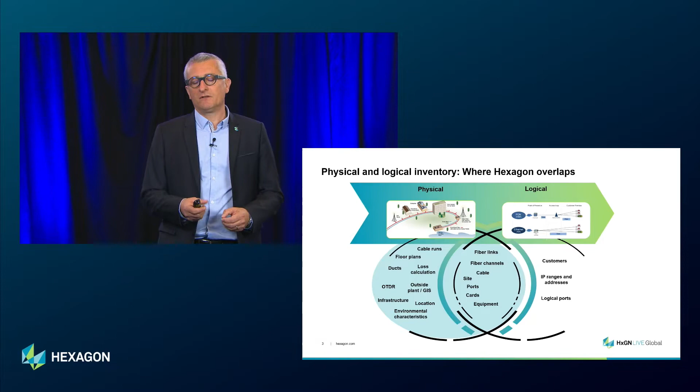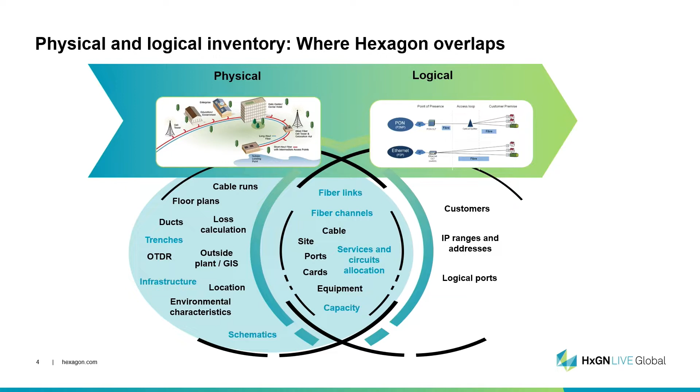This solution has been initially built for the physical inventory of telecom networks. Since a couple of years, we have increased the capabilities of the solution, mainly towards the logical inventory. You see in blue on the screen what is really new since the beginning. Fiber optic works was created in 2011, so after more than 10 years, we have increased more and more the capabilities of the solution.

If we look at the business workflows that we support with the solution, we've targeted mainly four workflows. The first one is the capability to prepare the work, meaning customers can prepare new activities in the field - new construction, changes to the network, and so on. For that, we can use a web solution.

We also have the tools to go to the field to perform surveys. It's much more than just going to the field and looking at where to dig, where to place new cables and new chambers. You can also go to the field and look at the facade, identify where to put new splitters, and even identify the number of living units in the building.

Once you have collected all the information in the field digitally, you can send this information back to the office, and thanks to the desktop application, you can go towards the detailed design. This is where you define all the capabilities, all the specific materials that you put in the ground, on the poles, or inside the building.

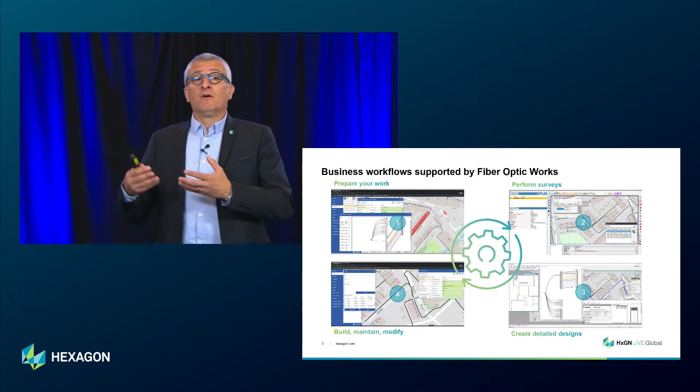Last but not least, thanks to the web solution, you can modify and plan the change for maintenance, for new construction, and follow up the construction in the field, as well as the modifications you need to do on the network.

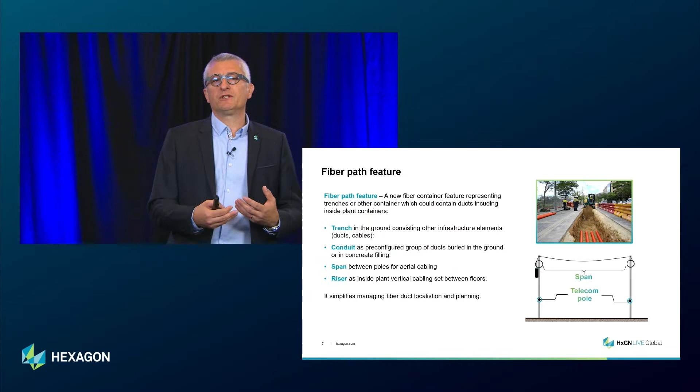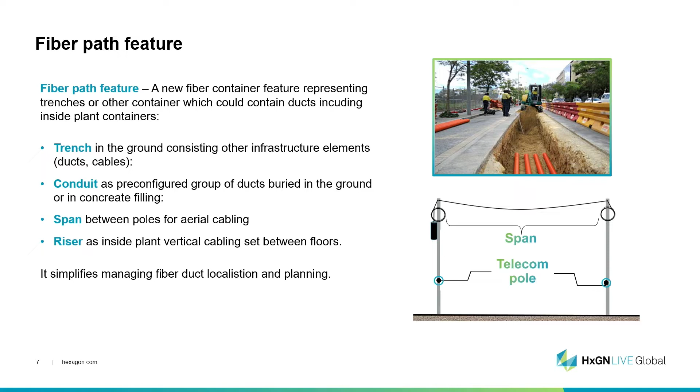Since the past years, what is new on the desktop solution? We've brought a lot of new features, and the first one, which looks very obvious, is the fiber path feature. This allows you to create the trench, but also the span that are between the telecom poles - all the objects that will contain ducts or cables in your network.

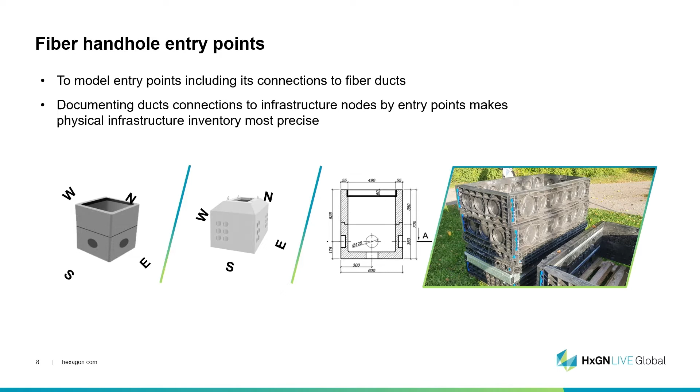Beside this, we have also extended the fiber handhole object. Currently, when you have manholes, you can have pre-built entry points, and very often on the manholes you have letters or numbers identifying each hole. Now we can identify and predefine through configuration management the holes you have in the manholes, and even identify where the ducts or cables are entering into the manhole and through which entry points.

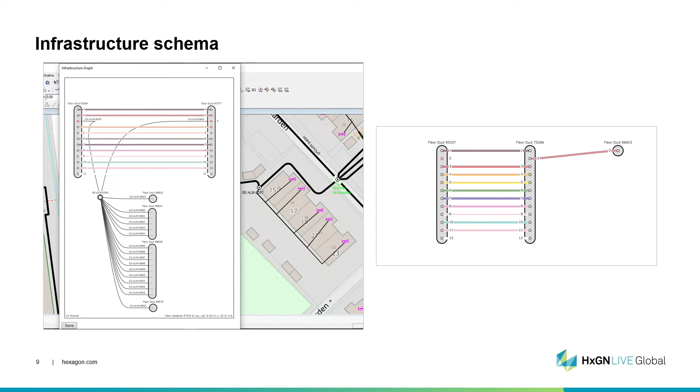We have also infrastructure schemas. On the desktop and on the web, you can generate on the fly the infrastructure schema - the layout of the fiber branch enclosure, but also the layout of the manholes. You see on the screen how it looks, and you have the same representation whether you start the functionality from the desktop or from the web.

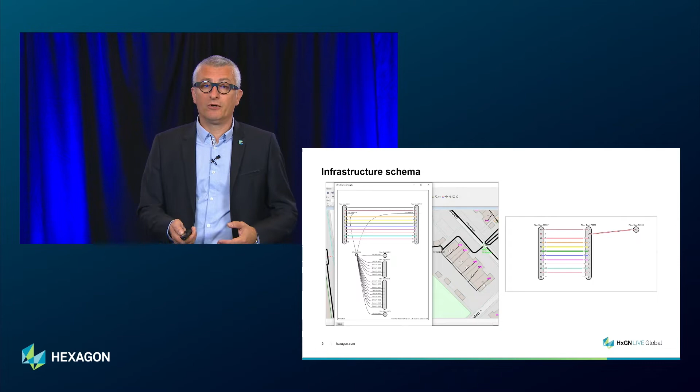When you generate the infrastructure of the manhole, you can go a step further and request a butterfly diagram. This powerful capability allows you to get the positioning of the ducts on different sides of the manholes, and also identify the north orientation of the manhole. This document can be used directly in the field through a paper document, or digitally as a PDF document if desired.

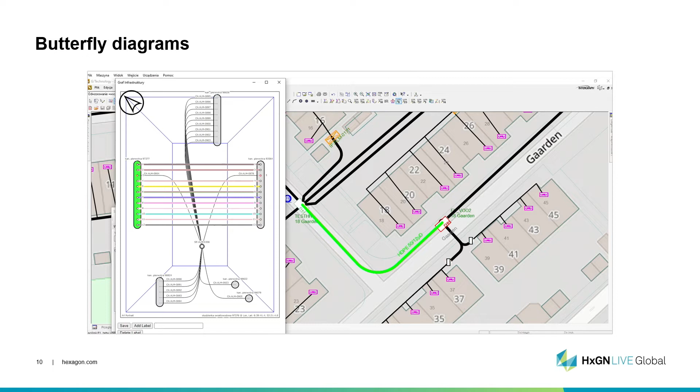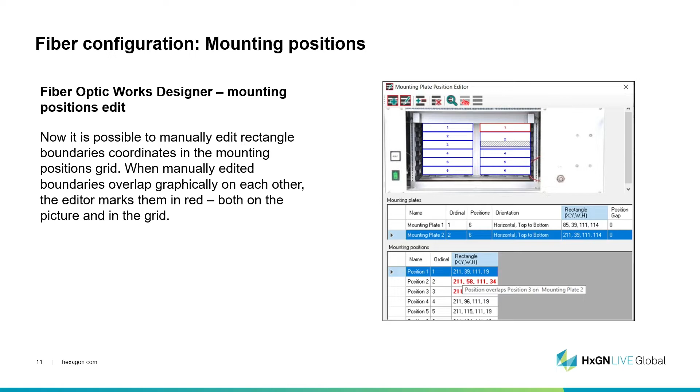What is also an extension that we made for the desktop, in the configuration of the device, is the capability to define the mounting position through the fiber configuration. Now you can define the mounting position in a rack, on the front and on the rear. When you put a device on the front, the system will automatically tell you the remaining space on the back of the rack - so you are really defining and building the rack as it is in real life.

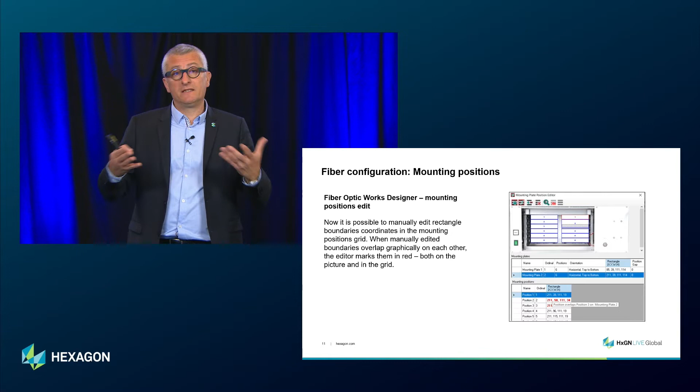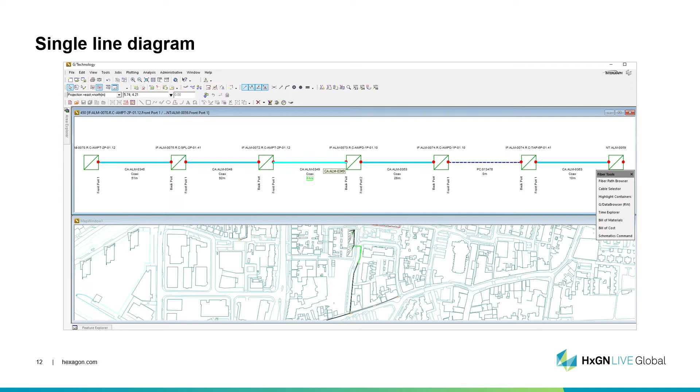The single line diagram is also a new capability of the solution. It's less graphic, but it shows you the fiber link, fiber path, or fiber channel, or even all the devices along the service. You have a linear diagram showing you all the linear objects with the length, and also all the ports and devices that are connected. You can get it on the desktop, but also save it as a PDF or digital document that you can review in the field.

Once you have a fiber link or fiber path, the main goal is to go for the logical inventory. Thanks to the service and circuit extension, you can allocate a service to a fiber link or fiber channel. This means you can identify, following the TM Forum standards, that you have a triple play - for example internet, video, and telephony on the line.

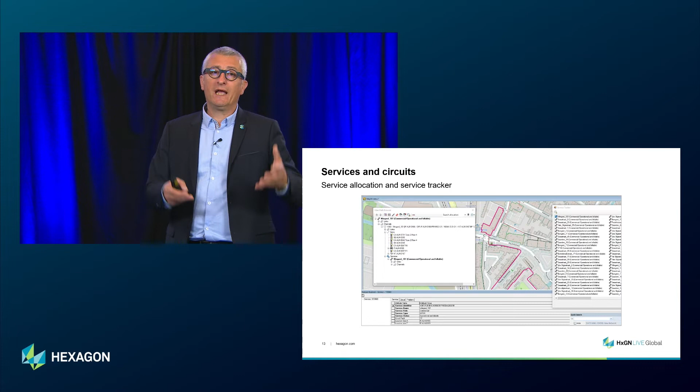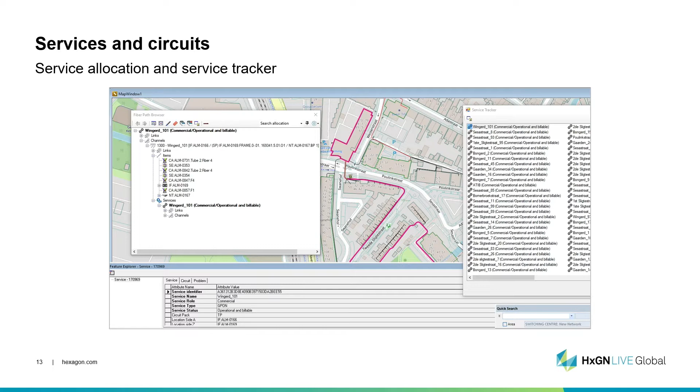Thanks to the service tracker, you can identify all the services concerned by a container. You click on the trench, you click on the duct, and you will have all the cables and fibers currently allocated. Even on screen, you can see in red all the services part of that specific trench, and which devices along the service are concerned.

Once you have the service, it's very interesting to understand the remaining capacity of the network. For example, if we click on the duct, we want to know the remaining physical space inside it - can we still inject a cable inside? This is what we call the physical capacity.

But we also do the logical capacity. This is the ability to understand if we can allocate new services at a specific location - do we have remaining fibers without capacity? This capability takes into account also the reservation of the fibers.

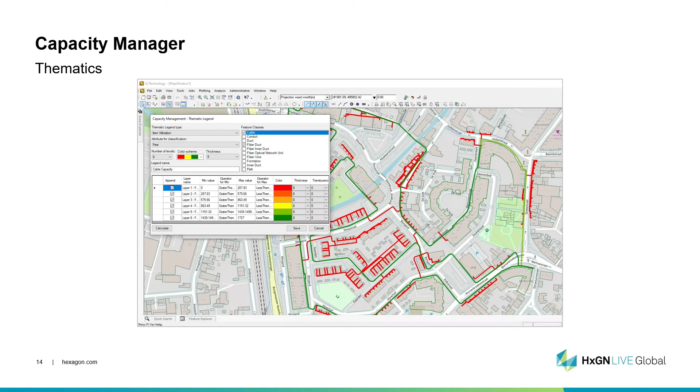The only issue with this functionality is that it's a real-time capability. It gives you, through colors, the current capacity. So this is, in fact, a reactive approach to capacity management.

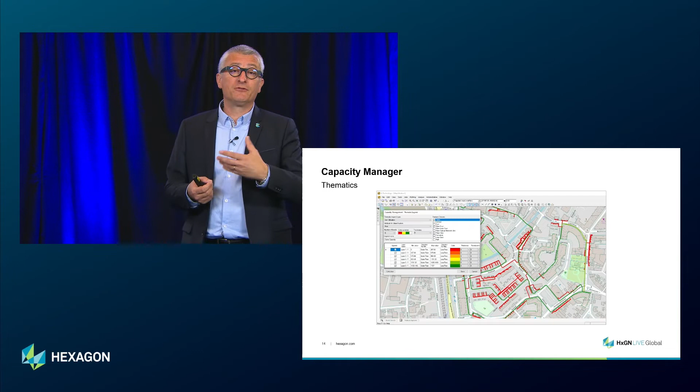For example, here we select a zone, and in the red zone, if we have to build or allocate a new service, we can see we have no place anymore - but it's too late, we are reactive. So for that, we have built the capacity estimation.

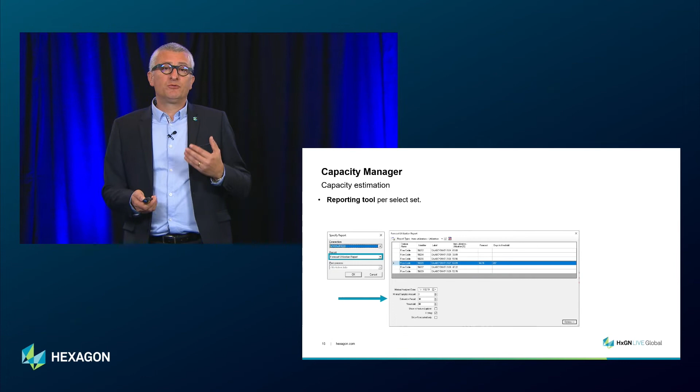This is a tool that takes into account the history of the allocation and allows you to compute a trend line. The trend line will show you where the capacity is evolving and at what time - for example, you can estimate when you will reach 80% of capacity.

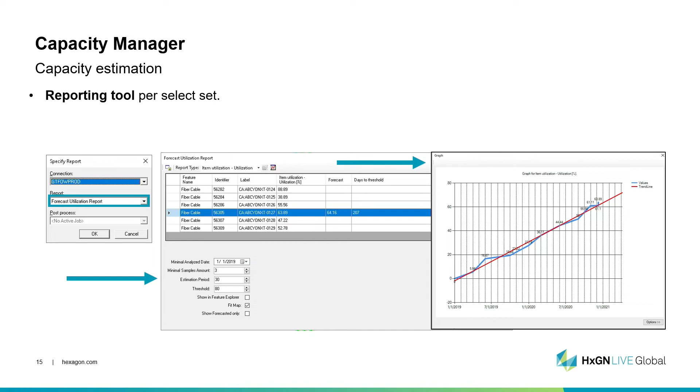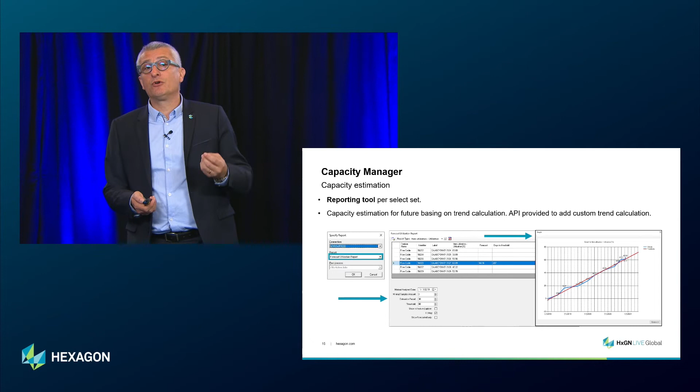This functionality replaces the reactive approach with a proactive one, because we can generate alarms that help the customer understand where he has to enhance the network - by rerouting, putting new cables, or even building a new line to allow the augmentation of the capacity.

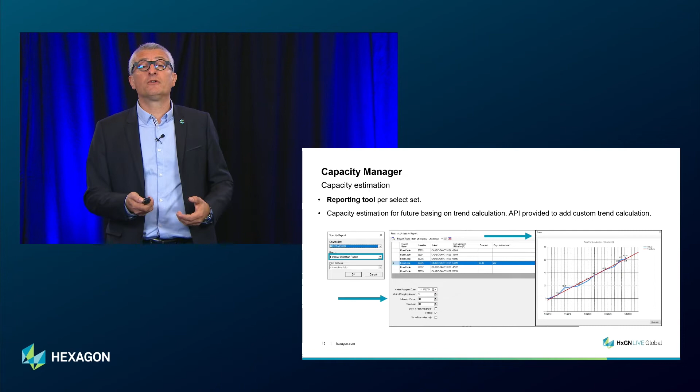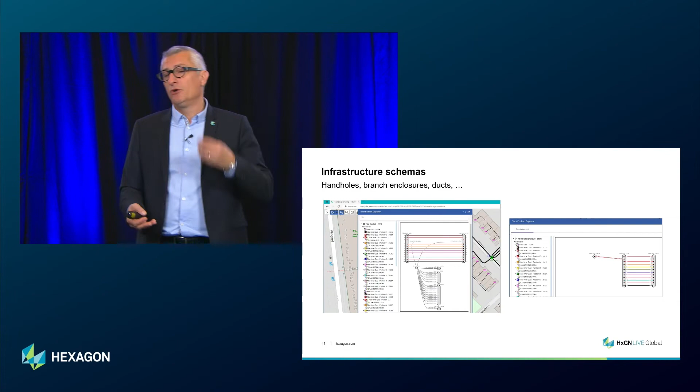This was for the desktop. We also enhanced the application strongly on the web. As I said before, we have access to all the infrastructure schemas - exactly the same capability as on desktop. You click on the handhole, you click on the branch enclosure, and you can get the infrastructure schemas.

We now have the capability, really, really powerful, to read and write the splicing and the port connection on the web. This means that if you are in the field, connected, you can directly, on the fly, modify the splicing of your device and modify the ports connected in the racks.

This means we are fully paperless, no risk of mistake when recopying from a picture or paper document. You change in the field, and we also take into account the job context - the change you make is in a job, and the job can be validated by somebody at the office.

We also have the fiber path browser. Again, you select a cable, you have access to the fiber link, fiber path, fiber channels directly in the web. This means you can review the service allocation directly from the web.

So the goal is really to go for mobile and allow our customers to have more and more access to the whole infrastructure and whole model directly from the web portal. Next step, after the desktop, after the web, is what's new on the mobile.

What we have done is enhance the G-Mobile advantage so that now in the field, with a single GPS, or even with only your finger, or just by writing manually, you can create features directly in the field - ducts, cables, inner ducts, manholes, splice enclosures. You just have to define the material and automatically in the designer you get all the information created for you.

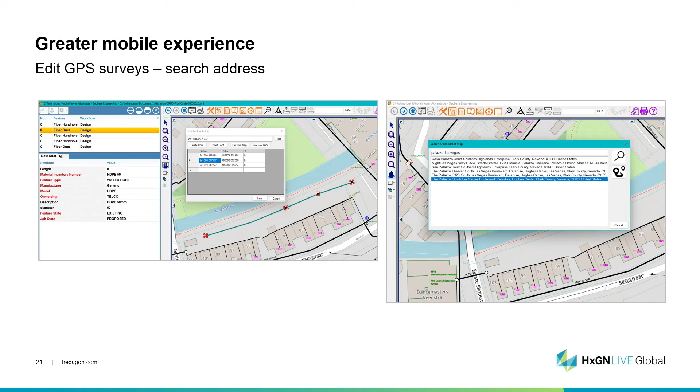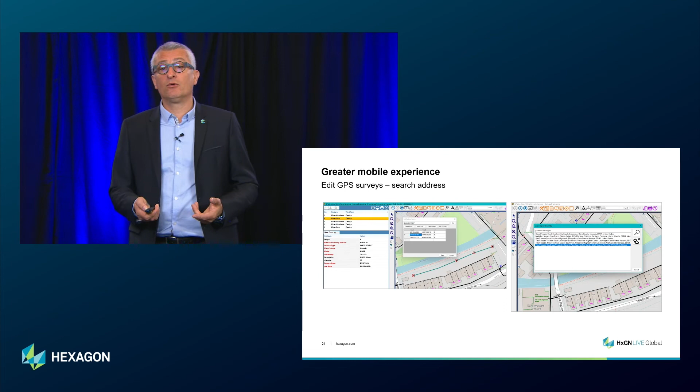We have also enhanced the solution with a new search capability. You can directly search for an address or a location, using the OpenStreetMap Nominatim search capability. And we can also edit all the points that have been measured through GPS.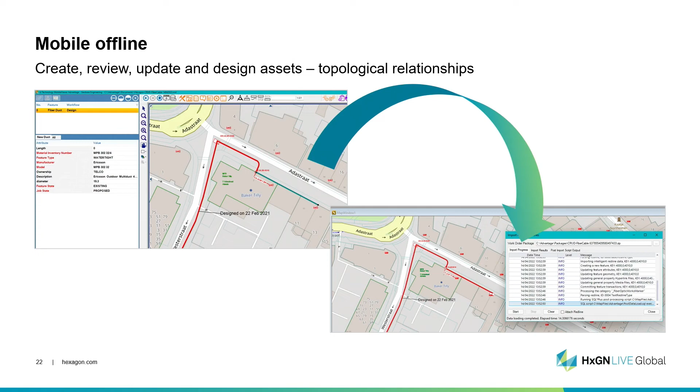When you come back from the field, you can reload all the information directly and automatically into the desktop solution. It will recreate the connectivity - all the information created in the field will come back. So, as I said, paperless, fully digital in the field, and the digital information is completely reused in the design.

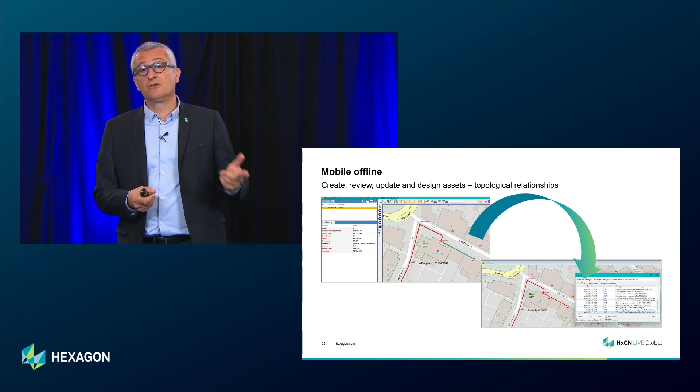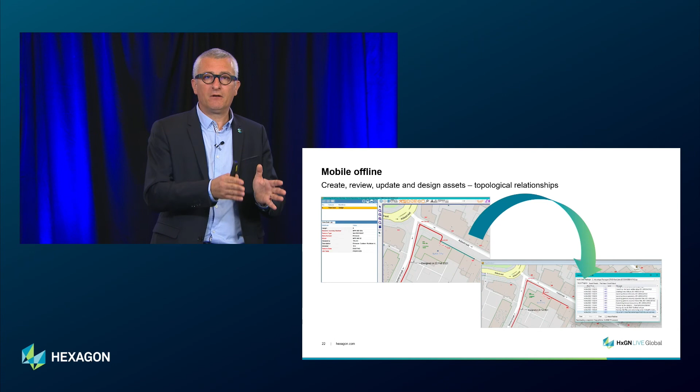So you see all what we have done over the past three years for the desktop, for the web, and for the mobile. The solution has now evolved from a pure physical inventory to physical and logical inventory, and we have also enhanced the web and mobile. Our customers now have the full digital solution for all the workflows they need, from planning to maintenance of the network - one solution, a single platform, and everything digital.